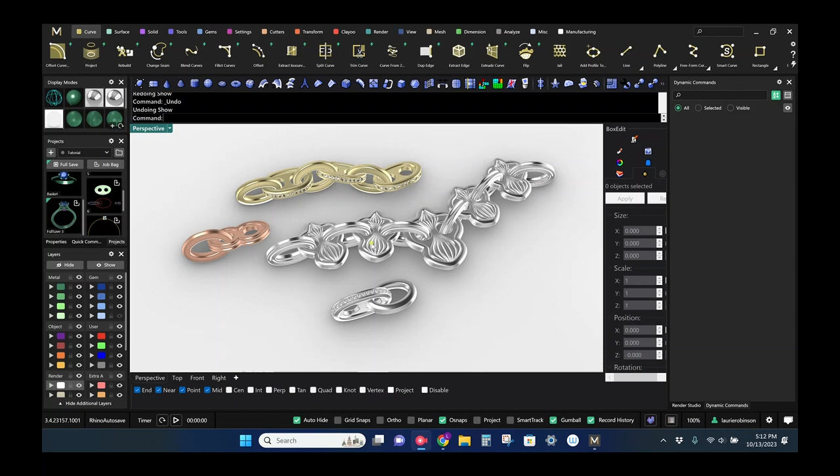Today I want to share my approach to making custom parametric chain links like these ones. You can create many different shapes and textures using this technique. And the beauty is that it is entirely parametric, so you can keep editing and adjusting as you go.

These examples are all of chain links, and that's what I'm going to be focused on showing you today. But you can easily apply what I'm showing you here to other types of jewelry. So for example, you can use this technique to make pendants or earring components or charms or little tags.

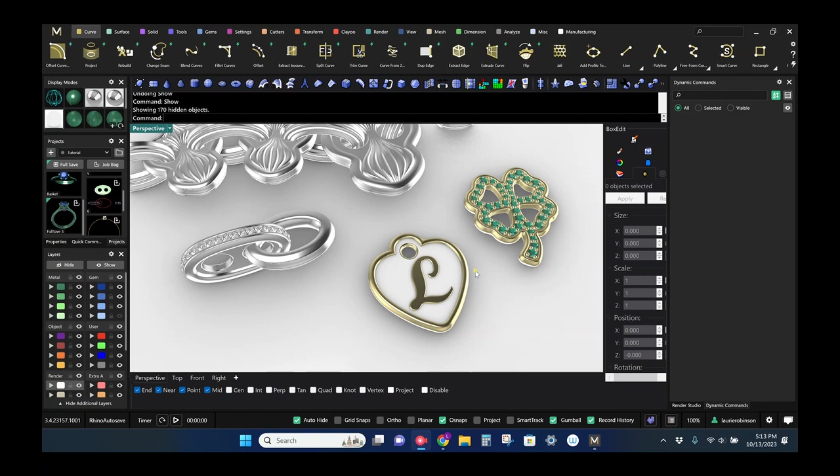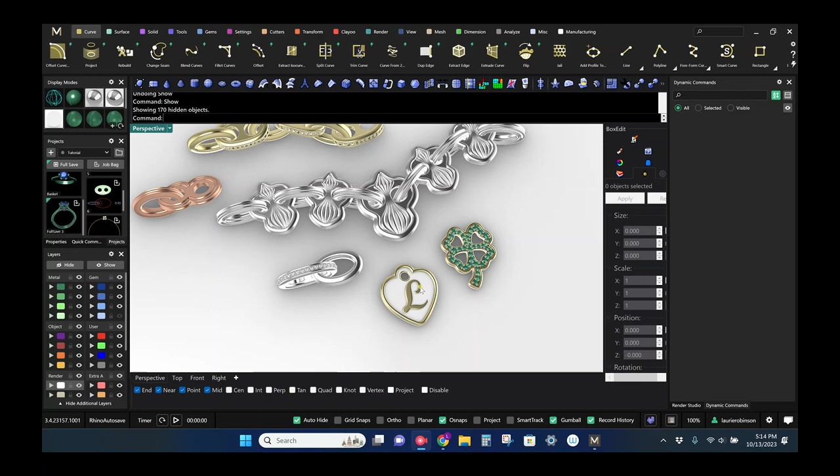It is really quite versatile, and what I like about it is that you start with something that looks very finished, and you can keep editing it instead of creating something with a lot of hard edges that really doesn't look finished and then waiting until the last minute to soften it and make it look finished. So that's why I like to approach it this way, and hopefully you will also find it interesting.

Okay, so let's just get started. I'm going to leave these here for reference for the moment. I'm just going to grab this job bag. Hang on a sec. All right.

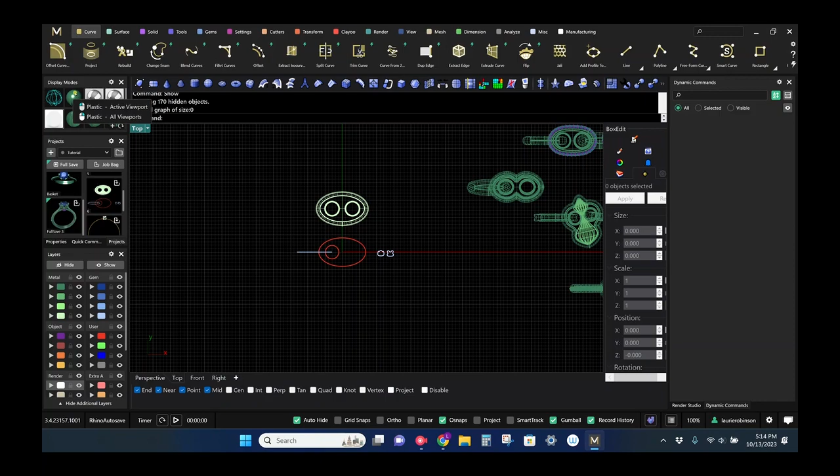So this is the kind of link, let me just change it to perspective, that I'm going to be showing you how to make today. And really more specifically, I want to focus on how to get this kind of filleted edge parametrically, and also just this kind of finished strip around the outside.

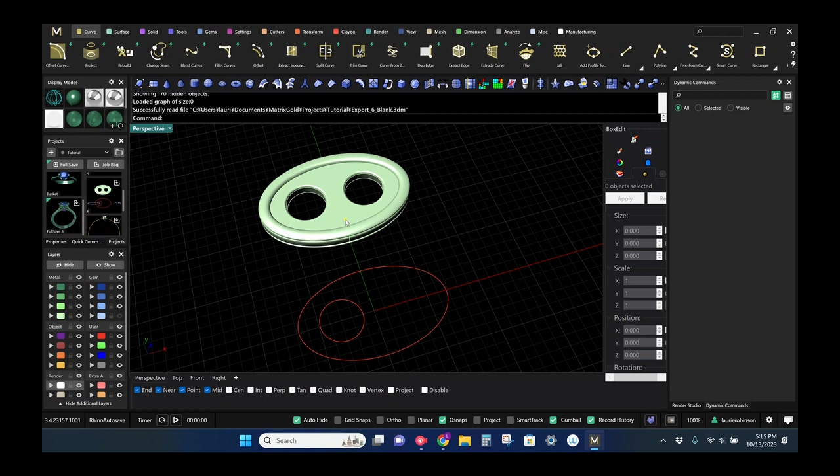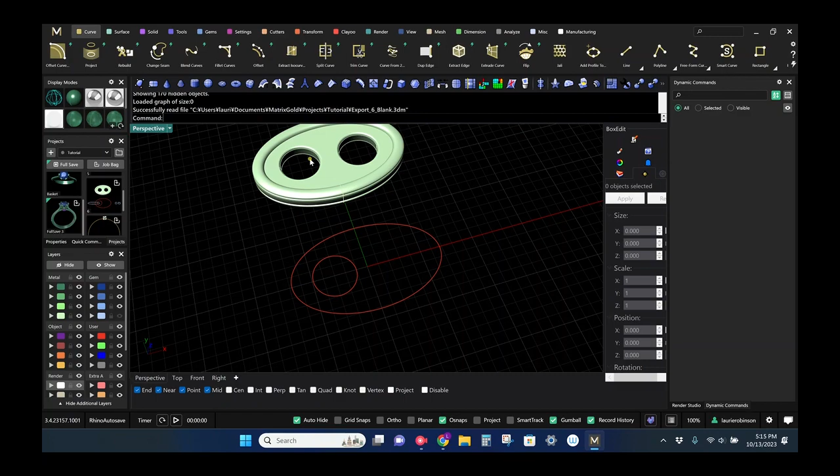Just to note, this works really well on flat surfaces like this, but the more curved your surfaces are, the less well this technique works. And also, the curves that you choose to use for these holes or the shape of your link, or like some of these are a little more complicated over here, like this one or this even, those curves should be kind of smooth or rounded and filleted, so you want to avoid trying to use something with a 90-degree angle or a really acute angle, or a sharp corner. But other than that, it should work pretty well.

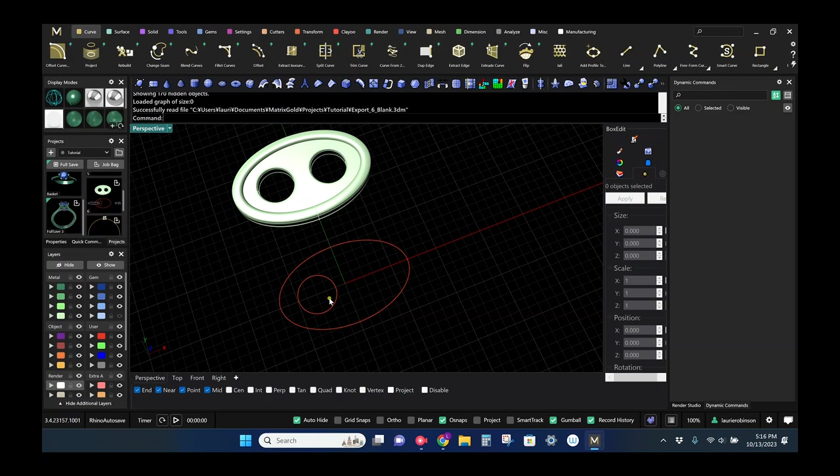Okay, I'm going to also slide this out of the way for now. Okay, so I'm just going to start with these curves. I'm going to turn the points on so you can see. They are both circle curves with 12 points. This oval started out just as a circle with 12 points, and if I run the circle command, I know this is really very specific, but I like to use deformable, and then I can name my point count before I get started.

And then I always like my seam either to be down here at 6 or over here at 3, so I usually just pull down. And then that allows you to immediately start changing the placement of control points without having to rebuild your curve. Okay, first of all, let's just look at those points one more time. So you can just see here quickly that all of these are symmetrical. That's important to me because I want this design to have symmetry.

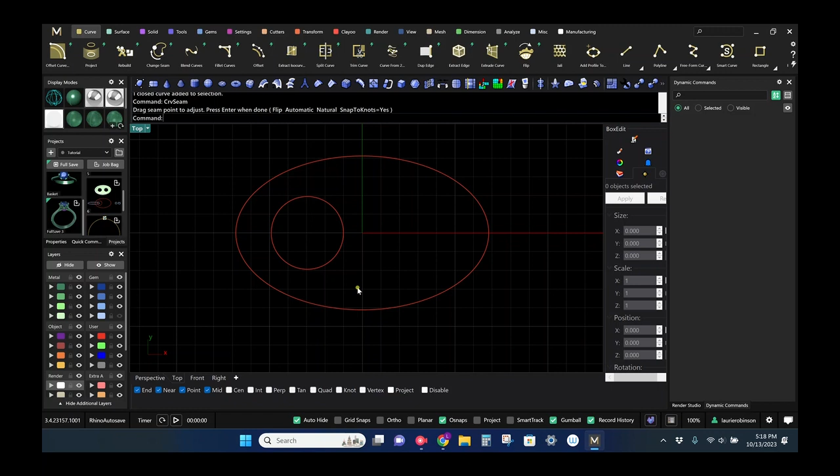And the other thing that I like to know is where the seam is. So I'm just going to type curve seam, and I can see this is here right at the 6 o'clock point, and then this should be the same. Okay, so because I'm just using these very simple curves to build the rest of my geometry or my shapes, I like to really make sure it's exactly how I want it, because that will allow me to edit more easily and nothing unexpected will happen.

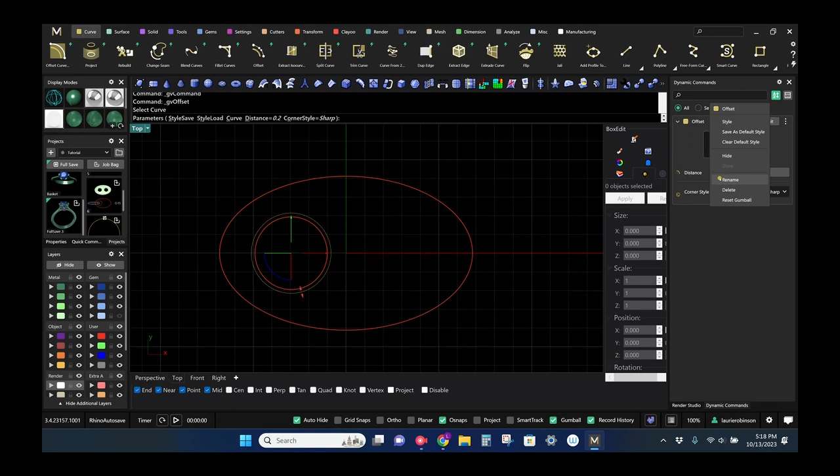So the first thing to do is to use the offset command. I'm going to offset this circle by 0.2, and this is pretty specific offset, but that will make sense in a minute or two. And I'm going to rename this just in case I make another offset. I'll be able to identify which one is which.

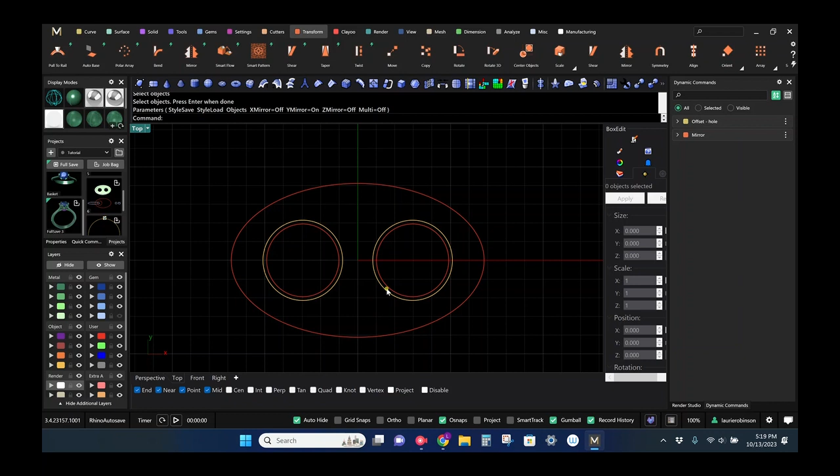All right, and now I'm going to come up here, transform, and just use the dynamic mirror. And I'm going to grab these two objects. That's fine. I want them to be mirrored over the y-axis. I'm going to ungroup these just to keep things a little easier. And I'm also going to put this on yellow so that I know it's dynamic.

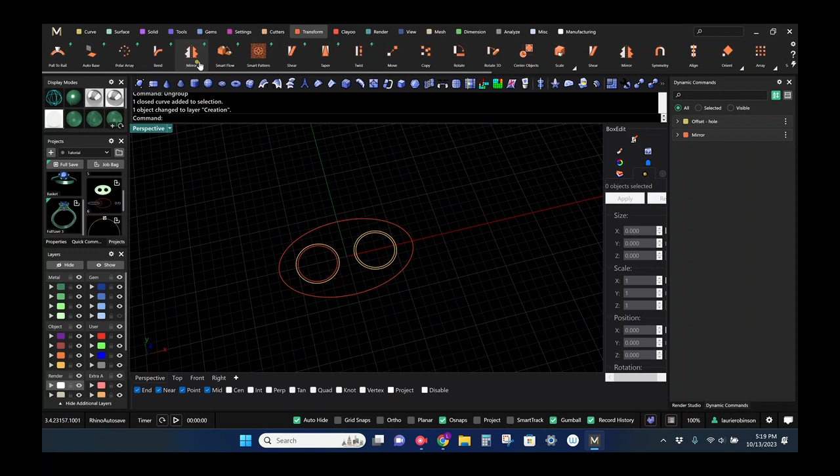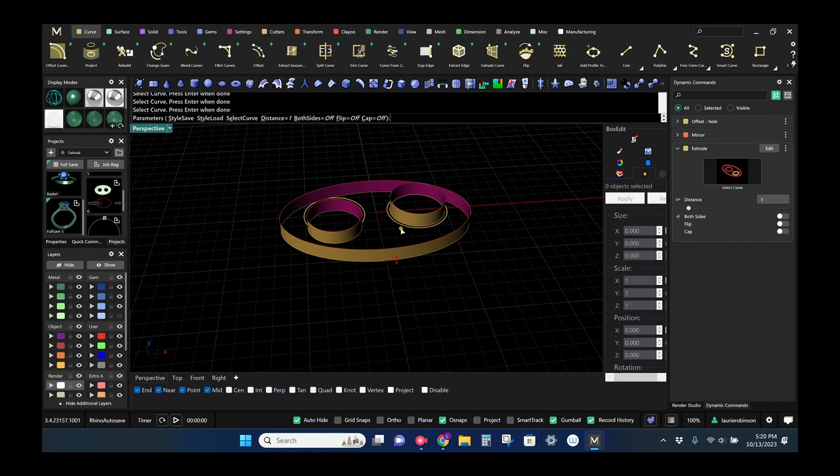All right, so now I'm going to make some extrusions to make this inner part of the link. I'm going to go back to curve, extrude curve, and grab this outside curve and these two inside curves. You can see these are going in opposite directions, and that's okay. This is mirrored, so it's sort of like a page in a book, just going in the opposite direction. But I'm going to use both sides, so it doesn't matter here.

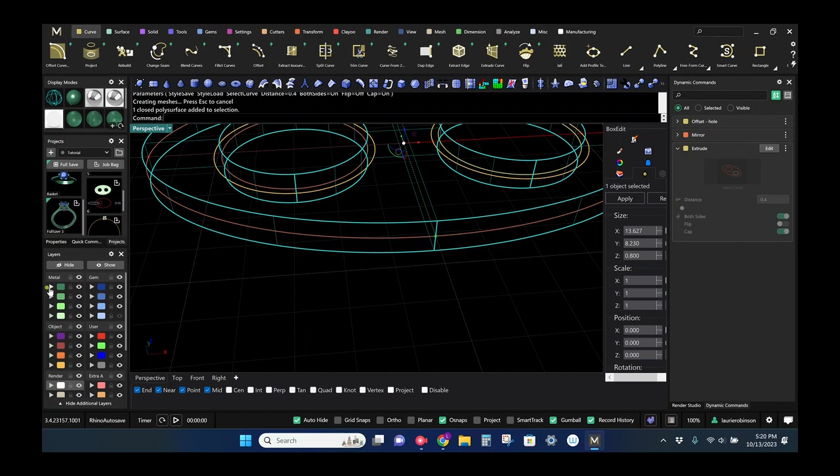I'm going to cap this, and make the distance 0.4. I'll put this on green as I go. Now I'm going to run that command again just by right-clicking, grab my outside curve again, and these two offsets. Same thing, I'm going to cap both sides, and make this 0.6.

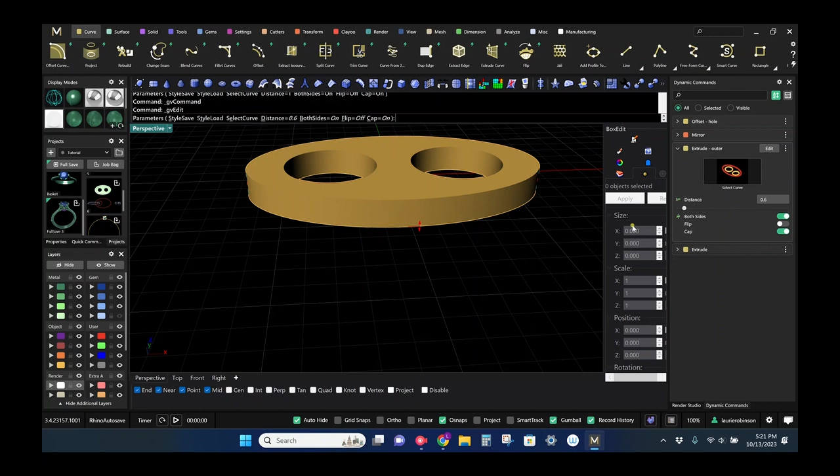So if you remember, I made the last one 0.4, so I want my distance to be 0.2 more than my first extrusion, which is also the value of my offset. That's not quite right, let's see. 0.6 - I think I didn't press enter. Okay, and I'm just going to rename this one outer, and this one.

And now while I still have it in wireframe, I'm going to use the project command. I'm going to grab these two offset curves, one on each side, right click, and select objects to project to. I'll select this inner extrusion, which is green. Just press enter one more time. Now let's move this extrusion to green too.

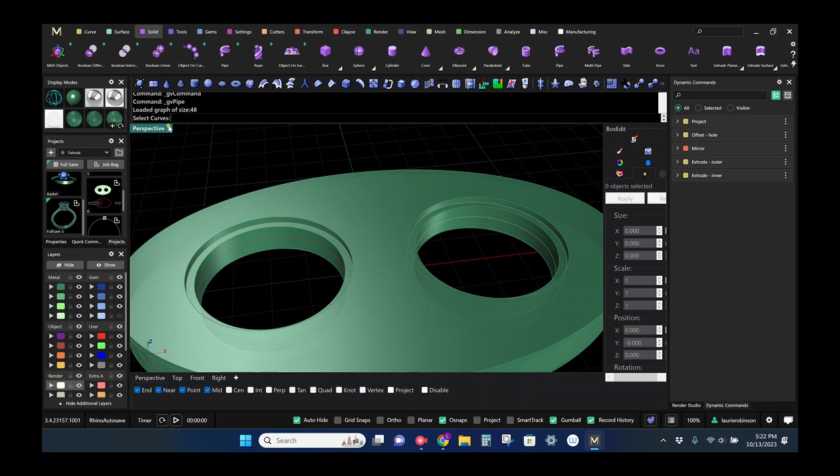Okay, so these curves here are my projected curves, you can see. And now I'm just going to grab dynamic pipe, and select the curves. I'll just grab this one, and it will select all four. This looks the same on the underside as well, and it grabs all four curves because it projected that curve on the inside, not only to this top surface, but also to the surface on the bottom, if that makes sense.

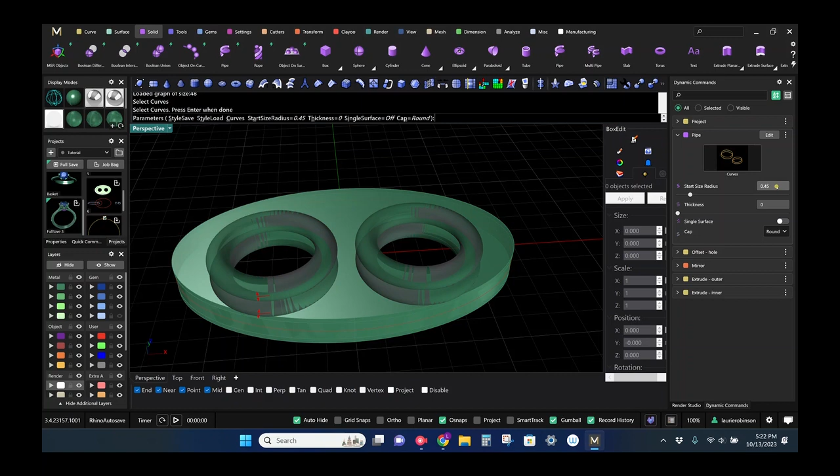Okay, and now I'm just going to make this radius 0.2, again the same value as my offset. So now that's pretty much it to creating this nice filleted hole here. And what's nice about this is that you can just keep editing this.

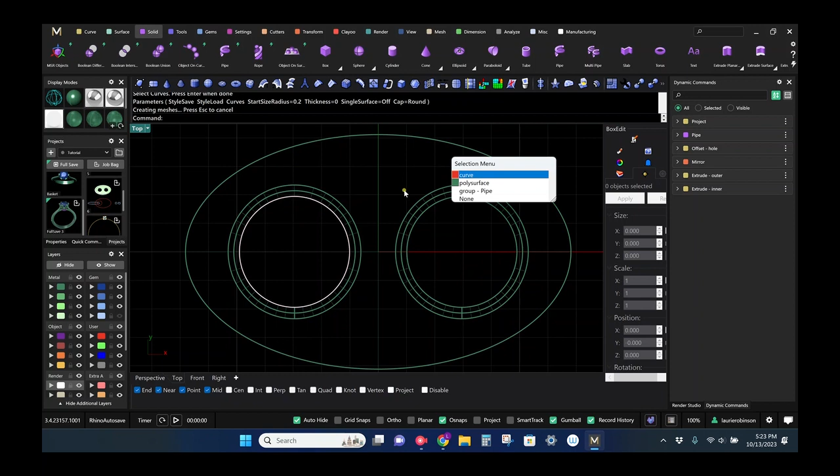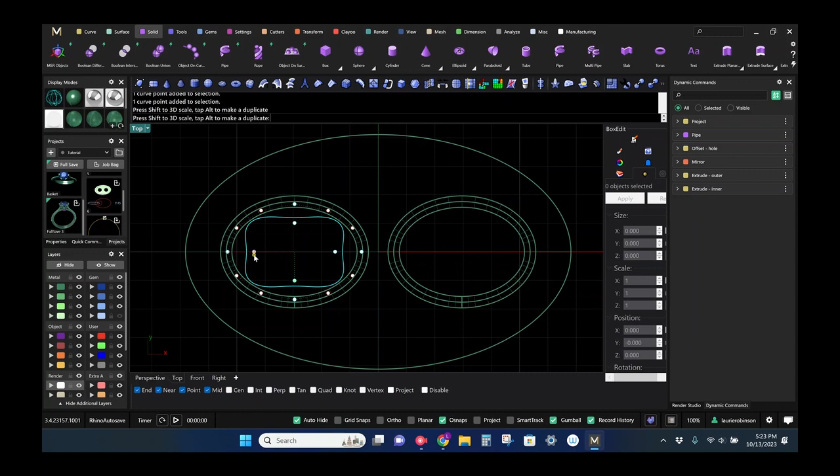So let's say you decided actually you wanted your holes to be oval and maybe wider, or maybe you want to turn the points on, and for some crazy reason you want to bring all of these points toward each other, like this. You can make all of these kinds of changes and still maintain this filleted look.

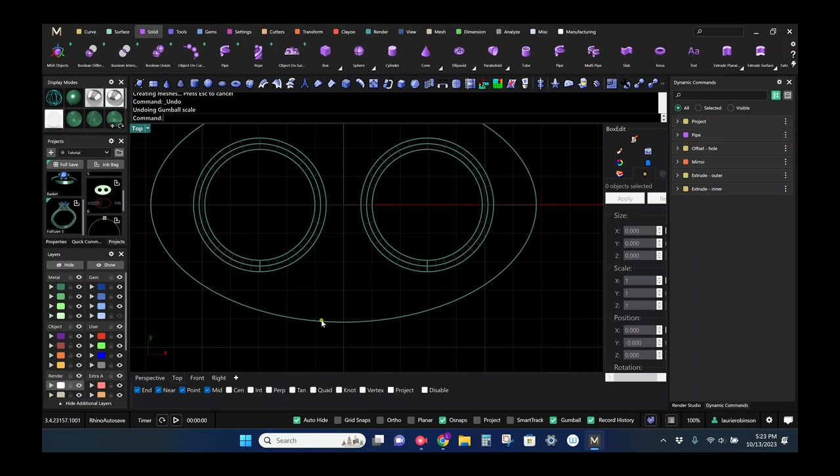So that is really nice, and that's kind of the first piece of flexibility. And then you can also decide that you want to edit this curve, so you can scale it like this or like this. These fillets aren't changing, the position of the hole isn't changing. You can also turn on the control points just the same, and maybe you want this to be more square.

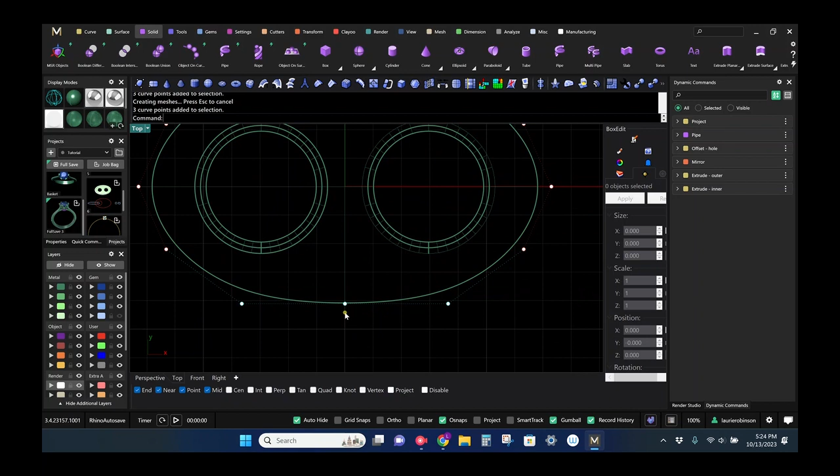So I'm just grabbing these control points and the scaling handle, and I'm going to type 0 to make them planar, and I'll do the same here, and just do this on the other sides. I don't have to keep entering 0 because it will remember the last value I used. And let's just slide these out this way.

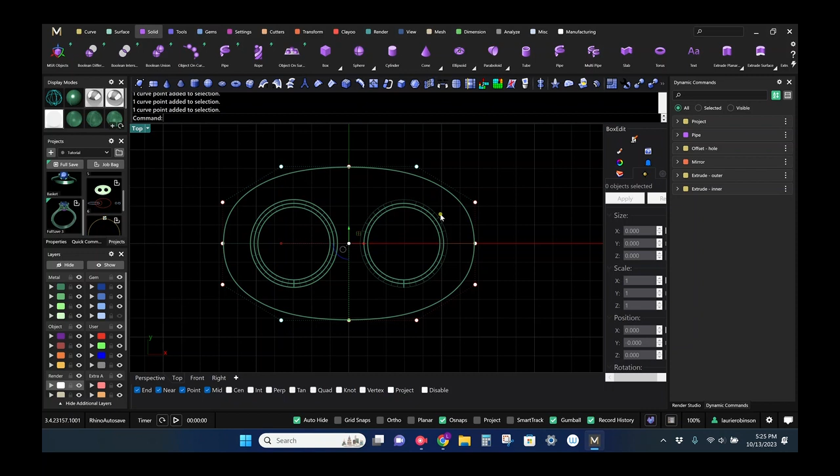Okay, grabbed too many things there, so let's grab this and this and this and this. Okay, and then we will just pull them out like this. And then you end up with something that is much more square. Maybe I'll make it - oops, it's hard to select this - maybe thinner.

And now maybe I want to change these, make them a little more oval and longer. Or maybe not longer, I'll just pull them out a bit. So something like that. And maybe I can make the whole thing a little shorter.

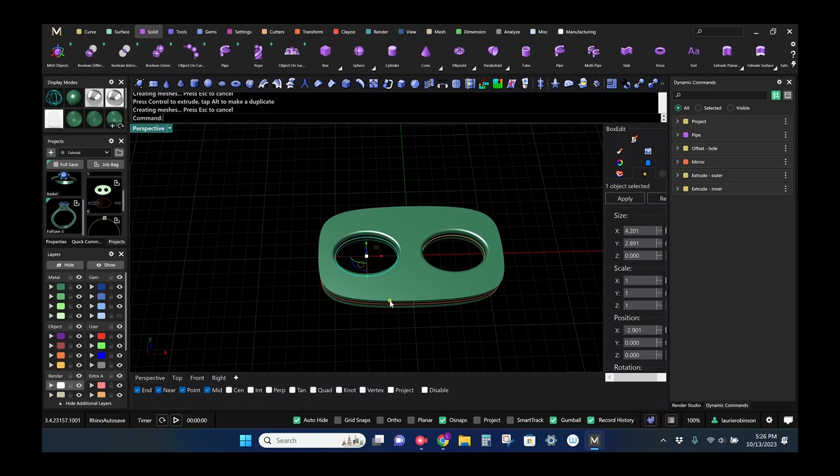Okay, so I'm really belaboring this point, but as you can see, it is very, very, very flexible, and it continues to be even after you put this nice decorative bit around the outside, which I'll do right now.

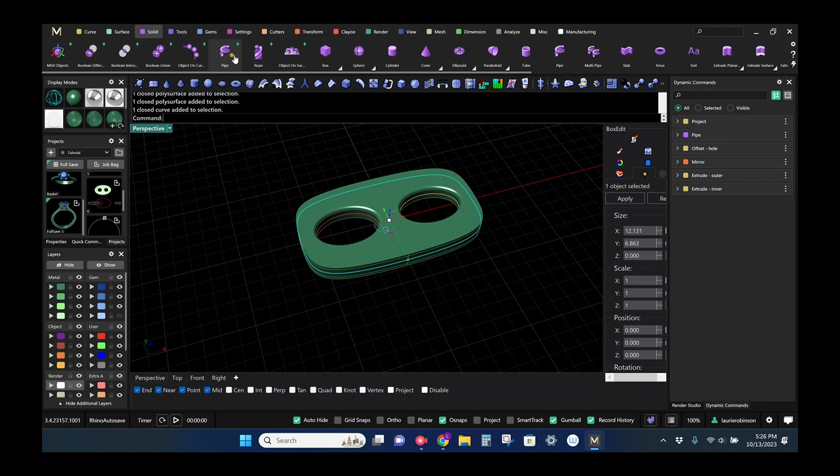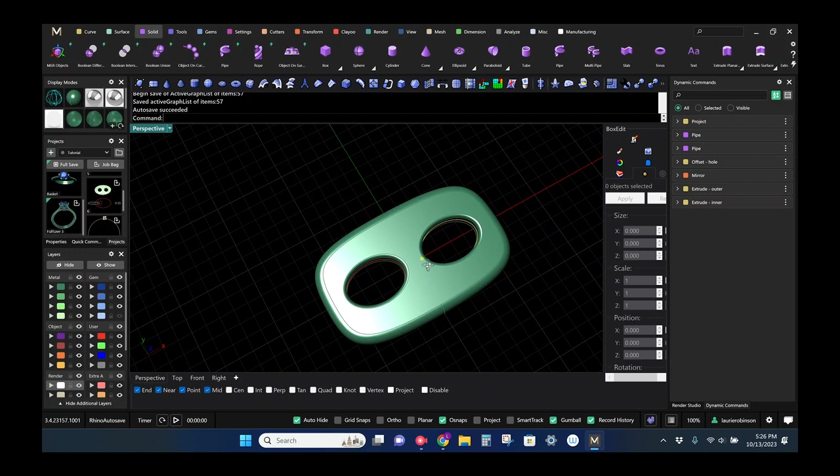So you could go really simple here. You could actually just grab this curve and do another pipe, and since I made the outer surface 0.6 on both sides, you know it's got a radius of 0.6, so you can just match that with your pipe, and then you can end up with something very smooth looking, with no raised rim. So that's one option, but I'm going to do something different.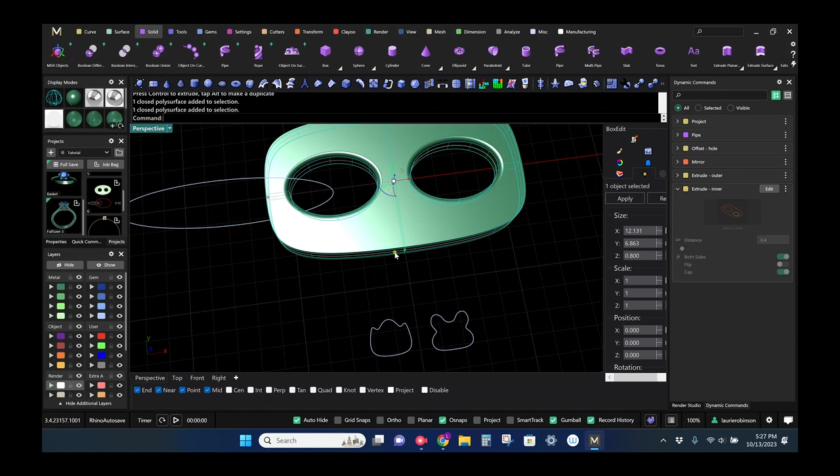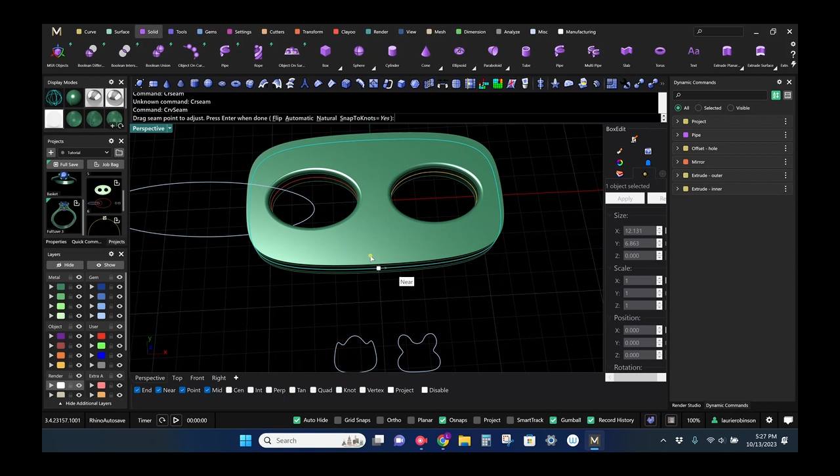Let's bring these back. I am going to put a profile on this curve and create a sweep. Actually, before I do that, I'm just going to come back in here and select my curve, and I just want to see if the curve seam has changed positions since I moved my points around. And it hasn't. But that is something to check for. If you add more points, or delete points, or insert points, sometimes the seam moves around, and it's just good to know where it is.

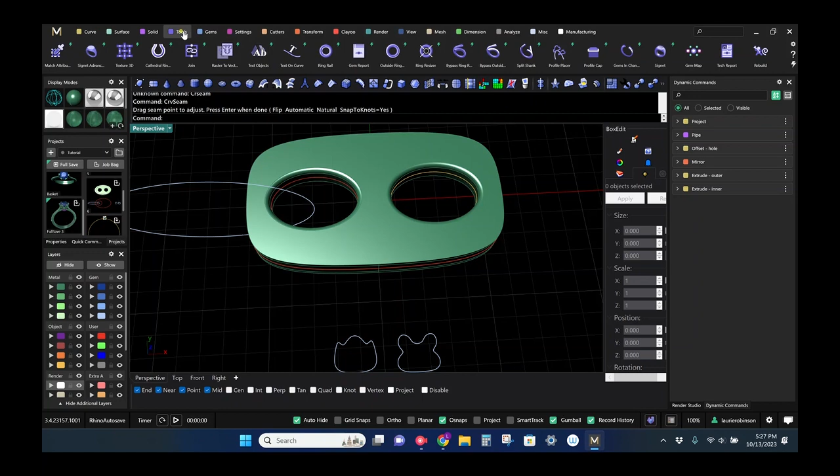Okay, so as I said, I'm going to create a sweep, and a really quick way to do that, as most of you know, is to add your profile here to the library, and then come over here to Tools and use Profile Placer. That is very useful if you have more than one shape or size of profile in a sweep, but in this case, I'm only going to need one profile.

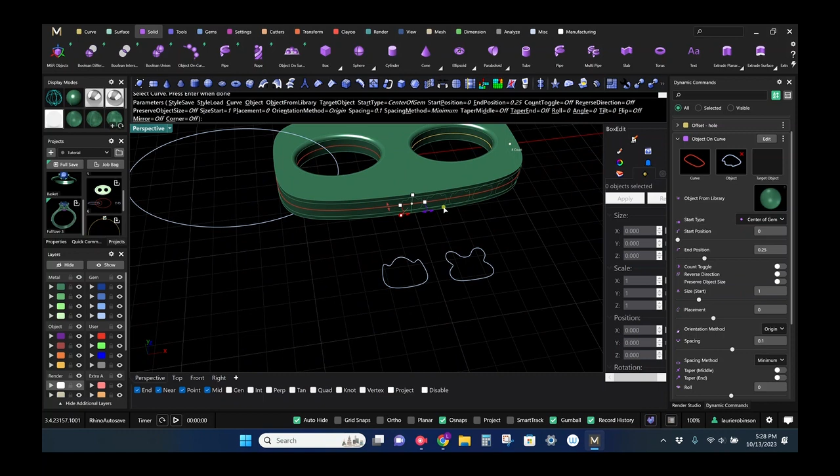So instead of Profile Placer, I'm going to come to Solid and use Object on Curve. I'm going to select my curve, press Enter, and then come up here to Object, and it's asking me to select an object, so I'm going to select this curve, right click, and then you can kind of see them show up here. I only need one, so I'm going to toggle this to 1, and then I want to preserve object size.

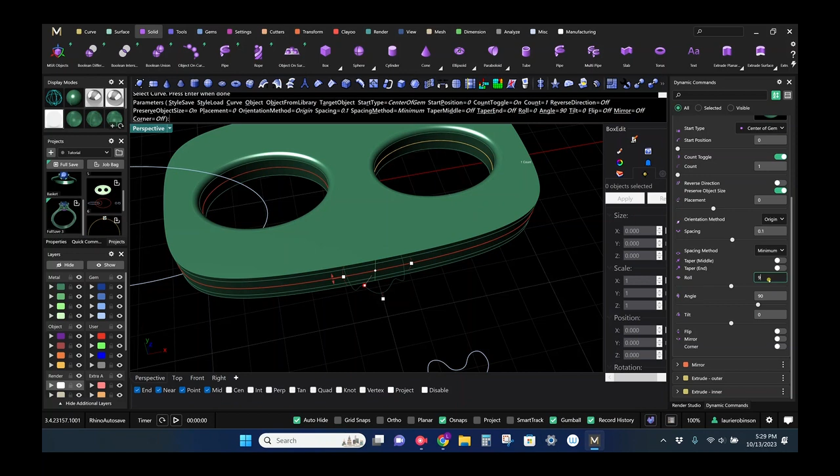And then the last thing would be to just get this aligned the right way. Up. And I did not, so let's just go back. I think I want to angle it first and then roll it. Okay, there we go. And maybe I'll bring it out from the curve just a bit. Okay, I'm going to put this on yellow, it's easier to see that way.

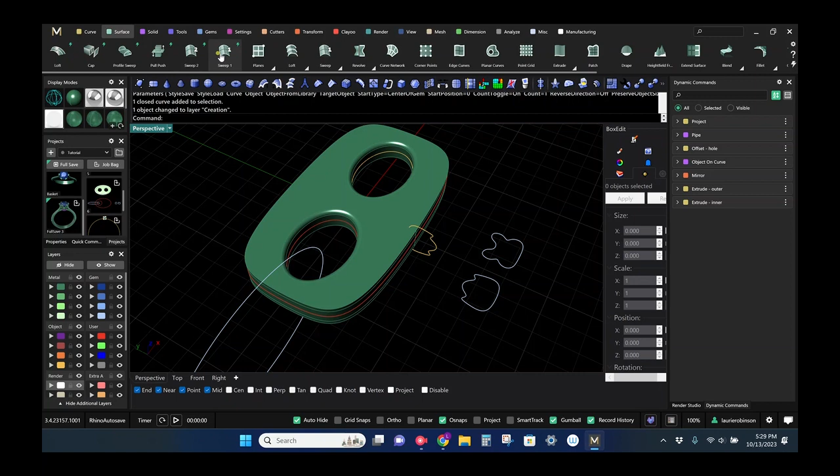Alright, so now I have my curve, and all I have to do is come up here to Surface and make a sweep 1. I'm going to select this curve again, this profile, and then there is my finished edge.

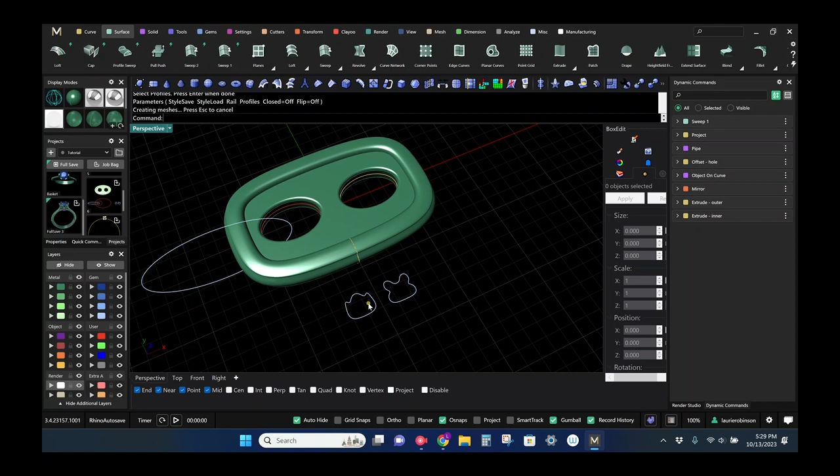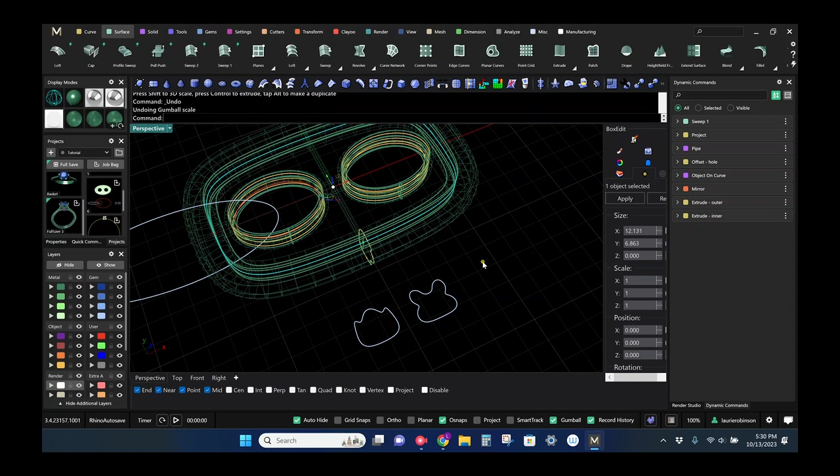Okay, and the reason that I really like using Object on Curve here, well, number one, you could easily just move your curve there and have it intersecting your rail. But I like to use this dynamic command because if you were to suddenly decide, actually, no, I really think I want this to be wide like this, you don't have to worry about moving your curve again. It's exactly where it was in relation to your rail. So that is the first reason that I like using it a lot.

And then I really like that you can preserve the object size. So if I select this curve, I can see here exactly what size it is. And if I need a really specific size, you can use this a little bit like you would the Profile Placer. This is just box edit.

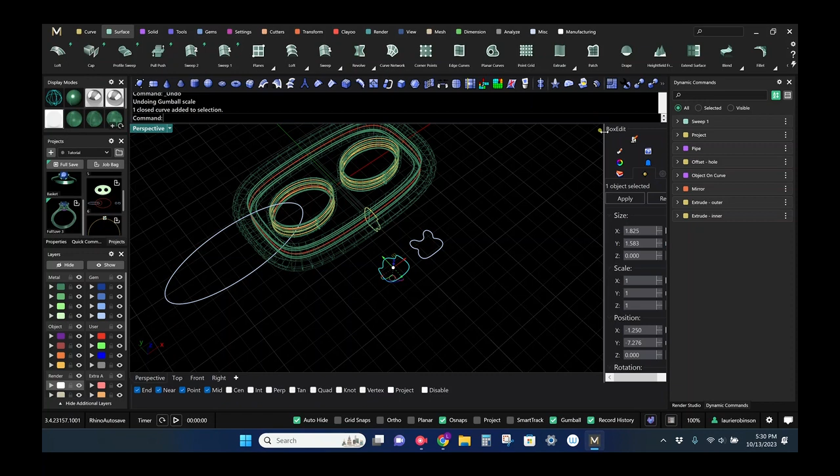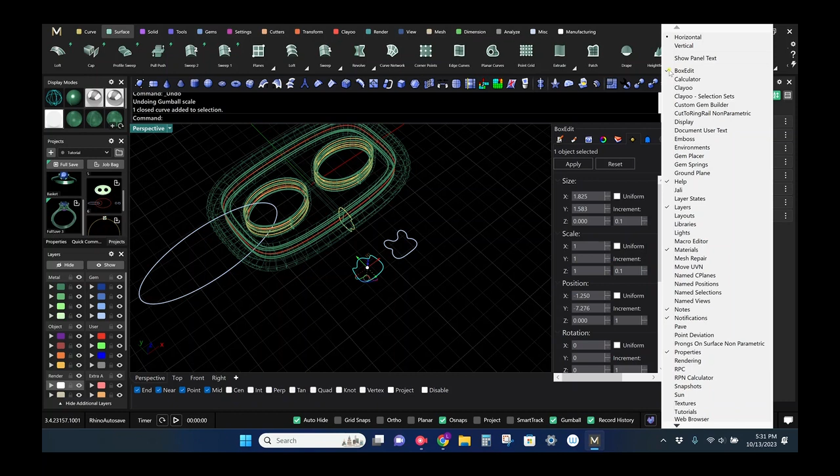It's just one of the settings here. You can have it... not activated, enabled. So you can see there's a long list here of these different options, and I just have box edit selected. That's up here. So anyway, enough about that. If you're looking for that, you can just type box edit into the command line.

So if I select this object, I can see what its dimensions are, and if I need to change it, then I can change it. And that will also be reflected here in the object on curve. So that is pretty nice.

And then you can also turn the points on. And you can just edit these right here in real time, and that will also be updated.

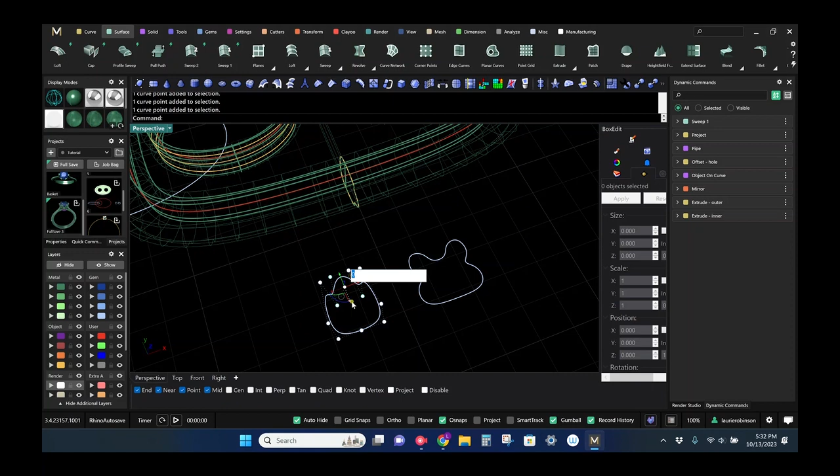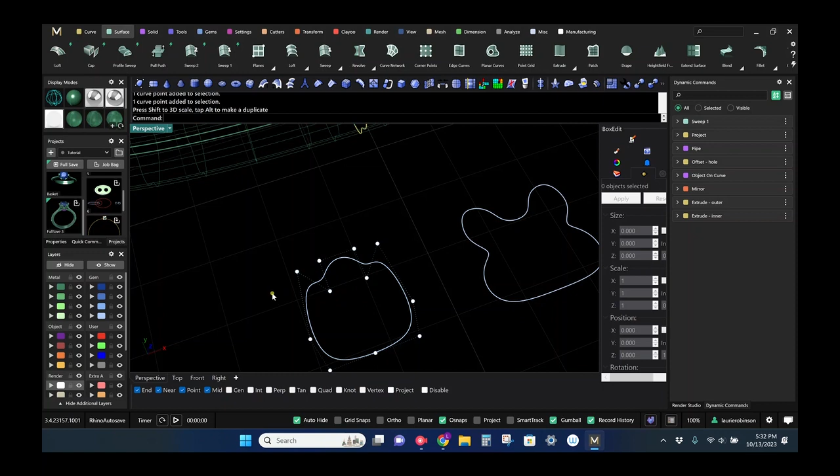I think one drawback of the Profile Placer is just that the editor can be kind of clunky, and also, when you put new profiles into the library, it can change the count and placement of your control points, which I find pretty annoying, especially since I really like to have a lot of control over those. So anyway, that's why I like using Object on Curve in this case.

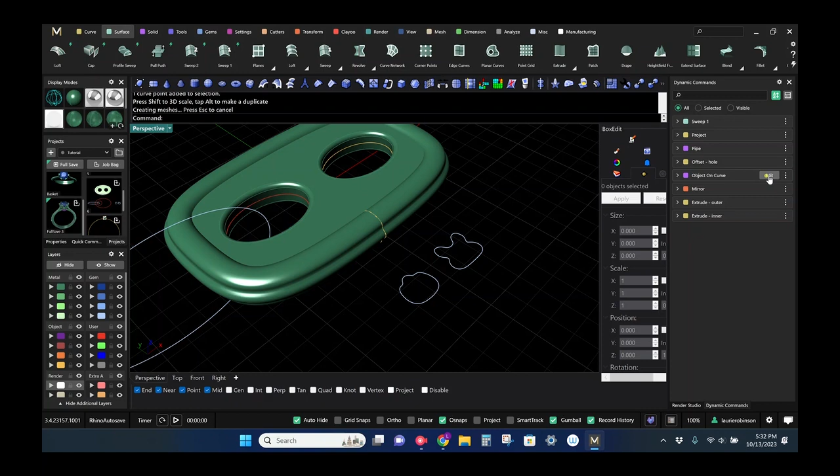You couldn't really see all those little edits that I was making, but maybe I'll just do a few more. So let's say maybe I want this to be rounder, and you don't have to keep this symmetrical if you don't want to. Or let's say I just decide I'm sick of this profile and I want to change it. I can just come here, get rid of this, click it again, and then grab this bunny ear type looking thing.

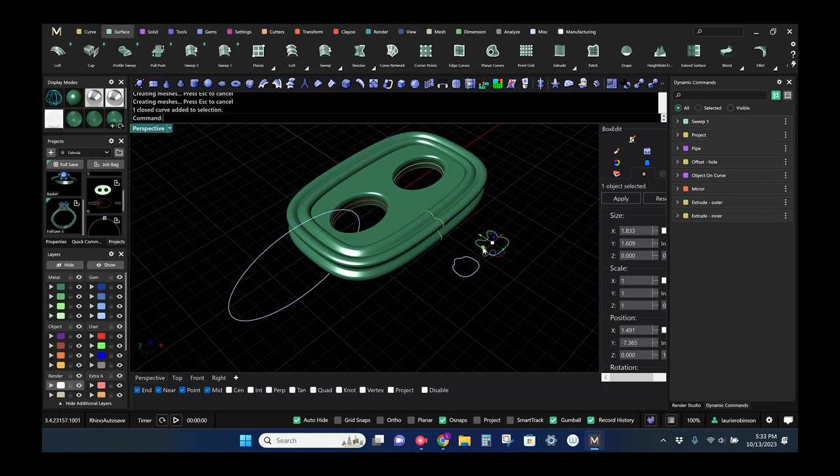So you could have 10 little profiles here and you can add them or exchange them really easily, which I quite like.

So maybe I'll just simplify this one a little bit. Well, actually, that's not too bad. Let's see, maybe I'll get rid of these and see what happens.

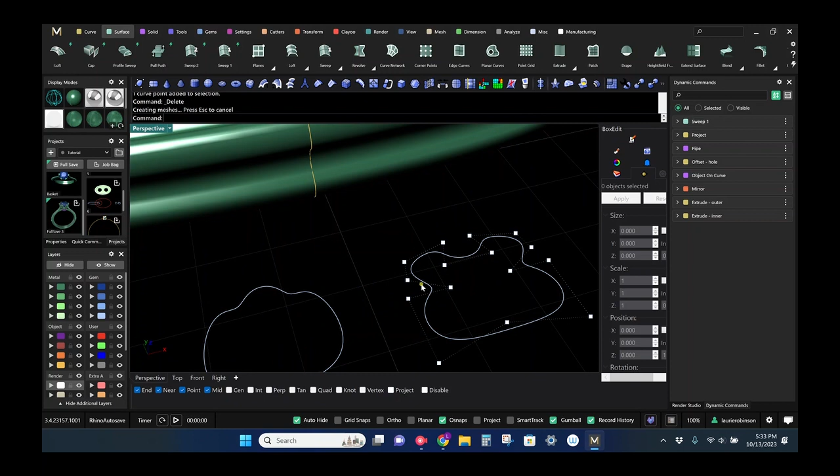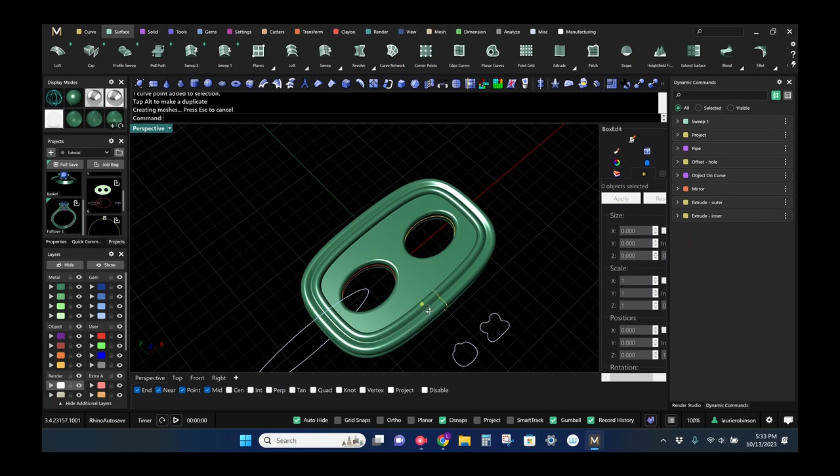This is another thing that I really like about working with a parametric workflow, is that sometimes you will discover things that you really didn't anticipate or mean to do, and it's only through the kind of automatic changes that happen when you're working parametrically that you even discover something will even work. So anyway, so there is the link.

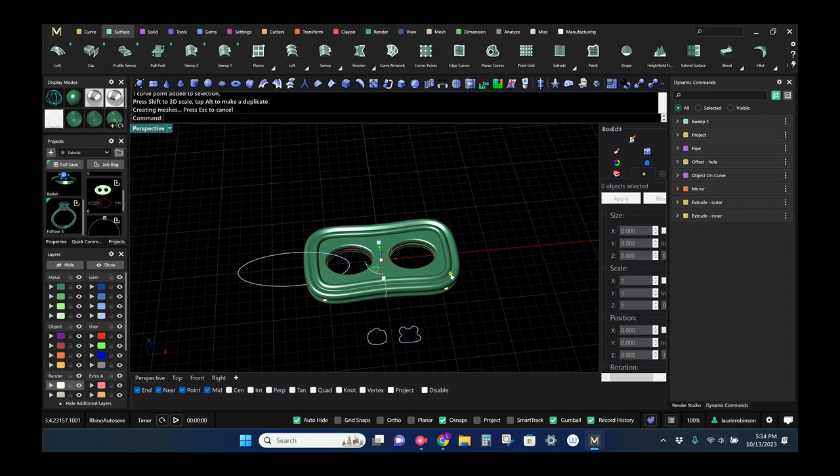It's pretty much all done. You can continue editing. I mean, even if I took this now and grabbed the points and maybe decided, you know, I really need these to be like this, you can see that it's just updating. It's not a problem.

Okay, but now I'm going to create this link and then I'm going to array them around a curve that's sort of approximately a 16-inch neck curve, just to show you how that looks. So you could make this link the same way that you made this one. You could do a pipe, or you could use profile placer, but I'm going to use a rope just for fun.

So I'm just going to change the diameter till I like the way it looks. Yeah, that looks pretty good.

From the front here, I'll just maybe grab the curve and squish it. It doesn't really look a little bit like it's not centered. Okay.

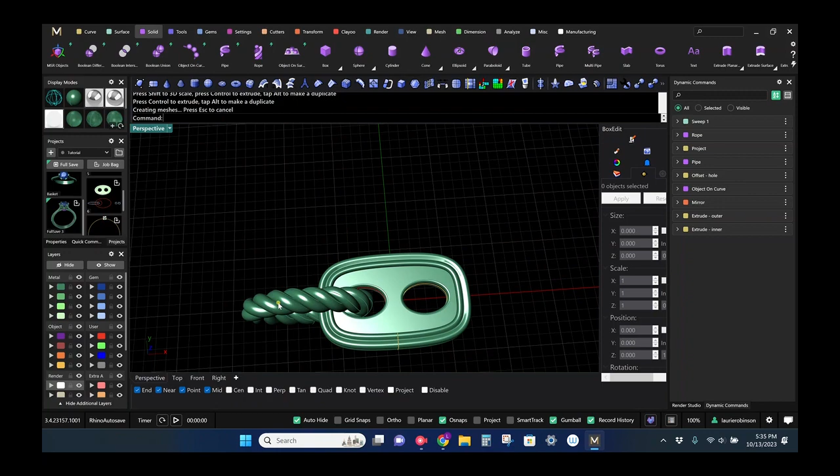So now I have these two links, and I'm going to hide this blue and the red. And so now I can array them around, just maybe for a rendering, you know, like let's say you were dying to see how this would look as a necklace.

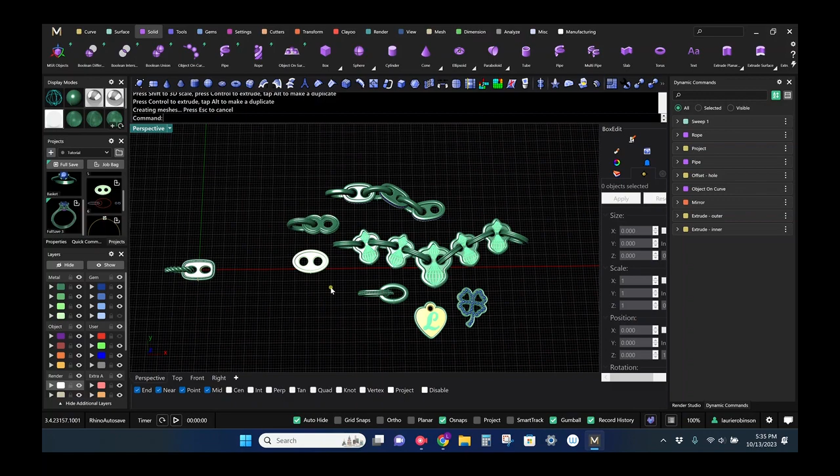I'm just going to do that final step. So first, let me put these all somewhere else.

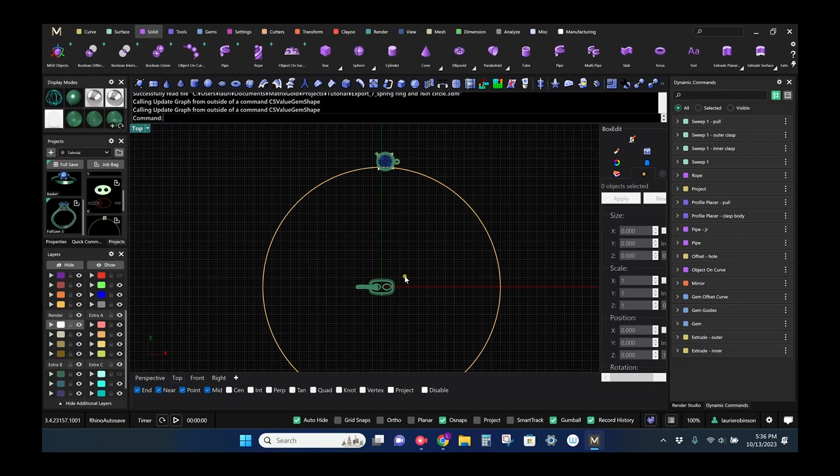Okay, I have a curve that I use for necklaces and also a spring ring for rendering purposes. I created those already, so I'm just going to import those and show you what I have going on here.

I use spring rings a fair amount when I'm rendering, and I really don't like having to create them again and again. And I also feel like they don't always work when you uniformly scale them, so I like to have control over all the different elements of the spring ring.

So I built mine around a gem, so I used a gem offset curve as my rail, and then I used profile placer to create this inner ring and the outer ring.

So I have these profiles which make the outer ring, and then I have the inner ring profiles, and then I have one, or I guess there's just one for that since it actually goes all the way around. And then I have this one, which is a curve turned perpendicular that I can use for my jump ring.

And obviously this isn't functional, but it gives a pretty good impression of a spring ring. And then the last thing I did is just use gem guides to create

some horizontal lines for my pull. And I like this because you can adjust the girdle spacing. So as it gets bigger, if you need the pull to be longer, you can adjust it this way.

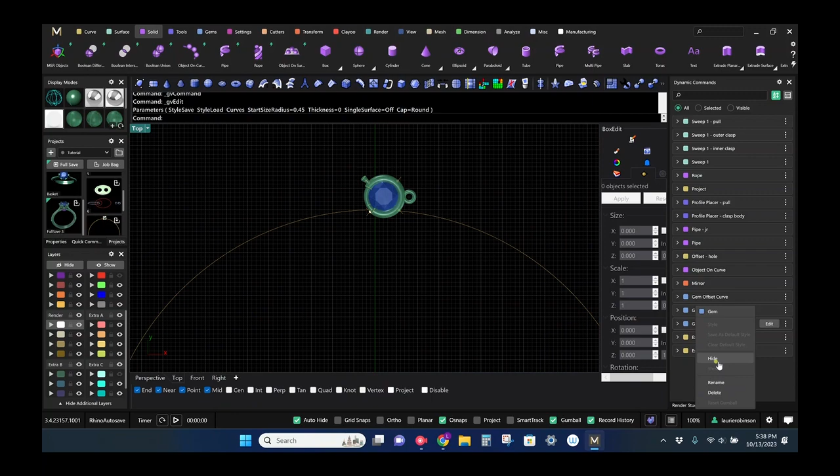Okay, enough about that. I'm going to hide this gem. And before I put these on, I'm going to use object on curve one final time, but I'm just going to create a Boolean union here.

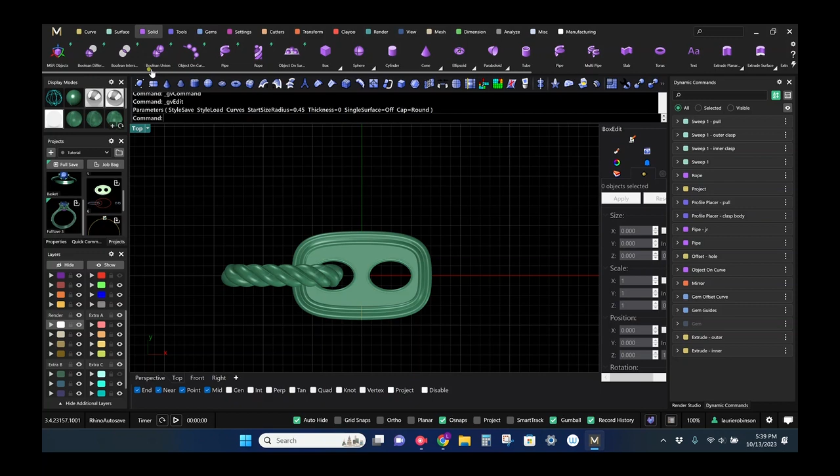I think this works a lot better when this isn't multiple pieces. So I'm just going to do that dynamically here with Boolean union. I'm going to select my outer rail first, and then you just want to make sure you get both of these surfaces and the pipes.

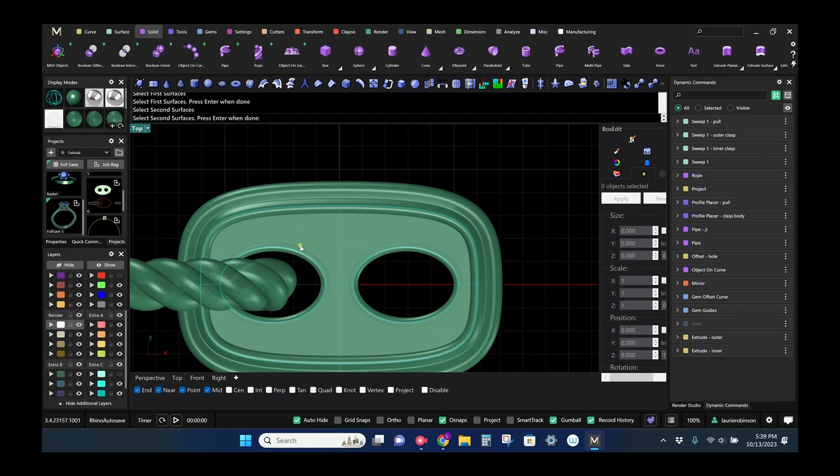I don't think that's everything. Let's go back. This, and then these, and this. One more time. All right, this surface, and then this, and this, and these. Is that working? Yeah, okay.

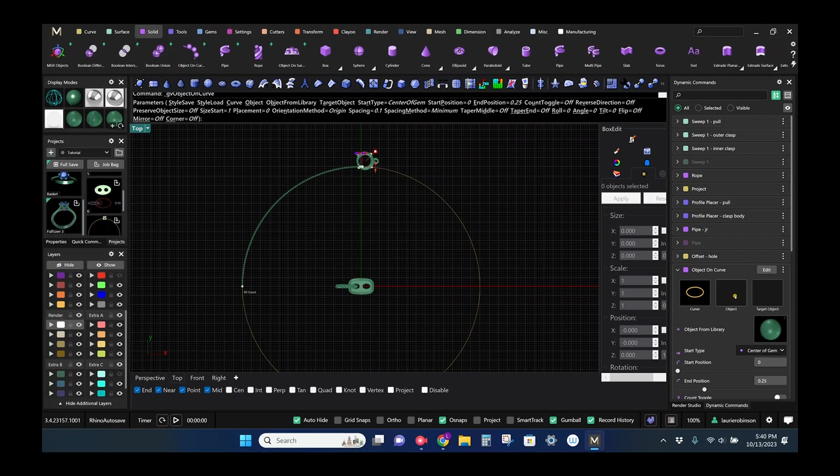All right, so now I can use object on curve one last time. I'm going to select my curve, and I am going to choose to preserve the size of this object, but first I'm going to select the object. What's nice is you can select two objects at one time now, instead of having to do this two separate times.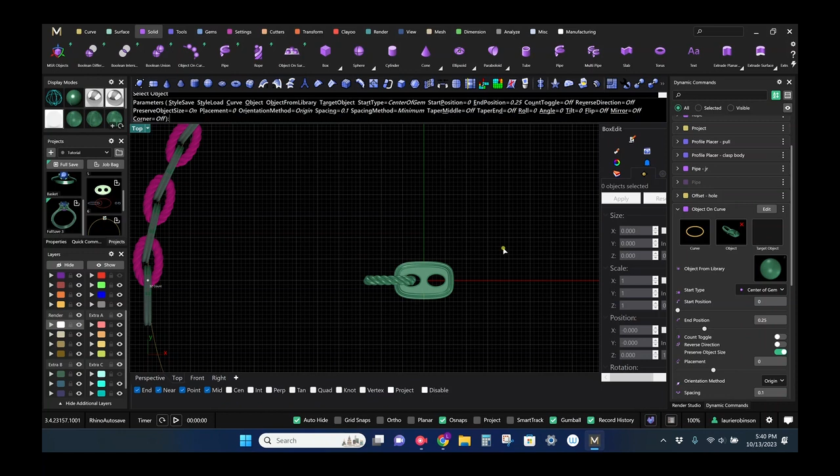And I'm gonna preserve object size, and I'm just gonna change the angle. I think it's the angle. Sometimes it's a guessing game, but I'm gonna change this to 90 and see what happens. Yep. And I can see I don't love the way this looks, but I can change that in a second.

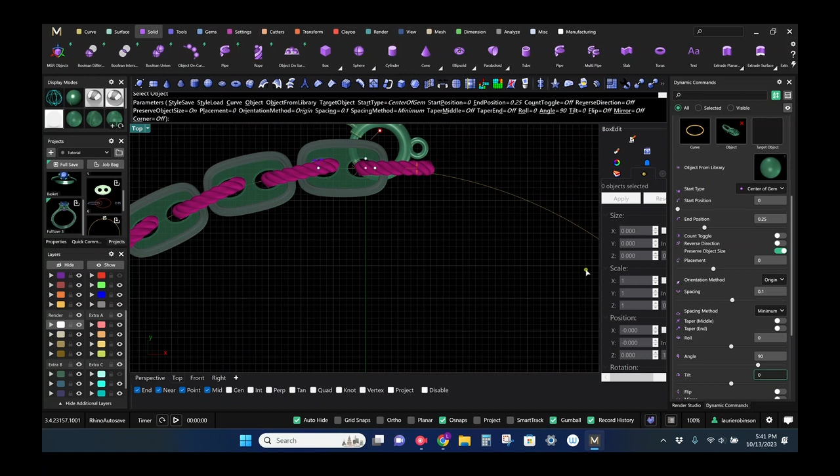Right now I'm just gonna fix the spacing. I'm gonna maybe try 1.5. It's too far, 1.2. Let me just pull this all the way around first.

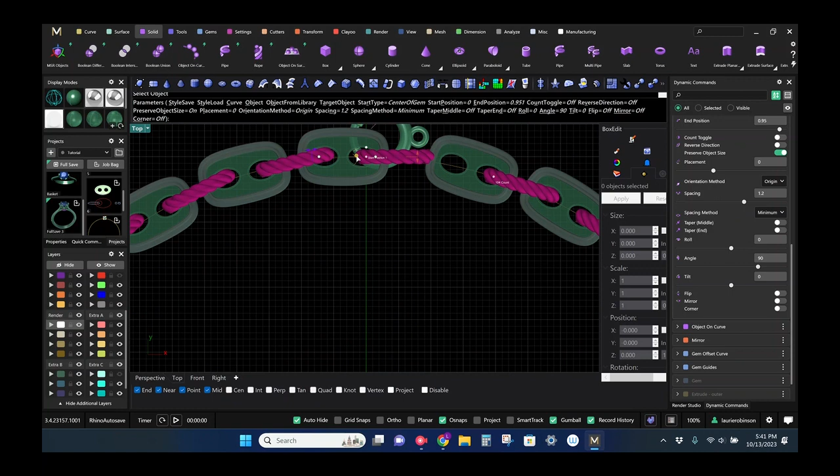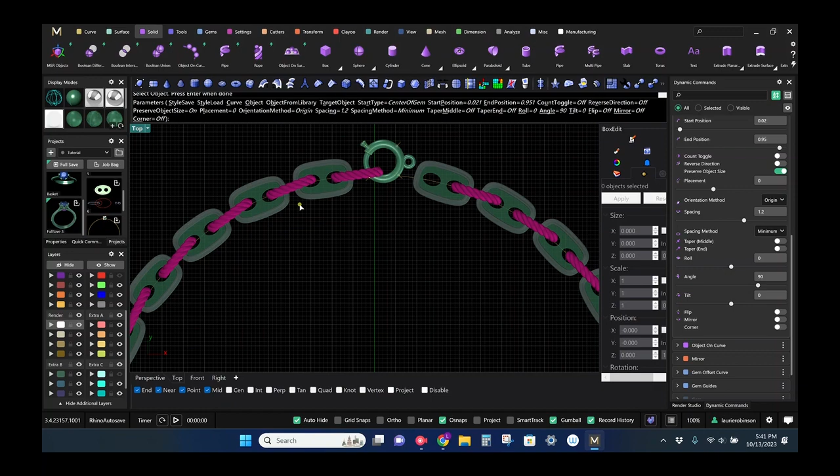And I'm going to change this. I find it really hard to see these handles sometimes. Okay, that looks pretty good. I'm just going to right click to accept that because I'm having a hard time really seeing it.

So I'll just make a few last changes. First I'm going to just change this situation where it kind of looks very rigidly like it's at a diagonal. So I'm going to come back in here, turn wireframe on.

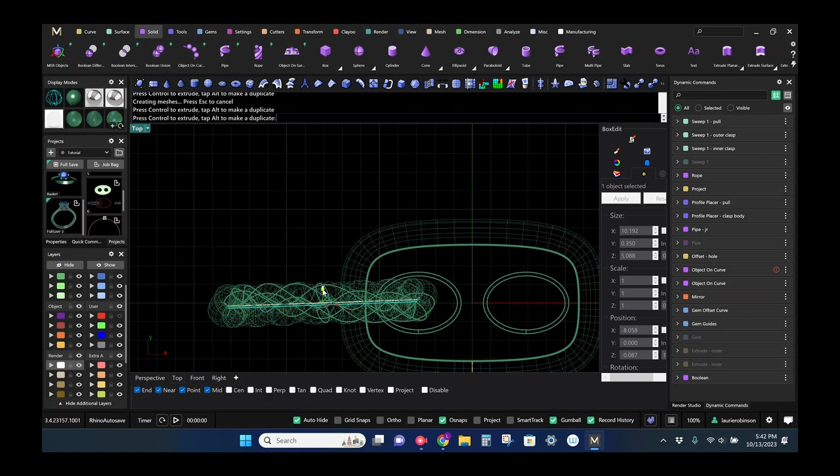I'm just going to grab this curve up, and I'm just going to very subtly angle it, and move it down just a hair, and I think that should improve the way it arrays around. Yep, that looks better.

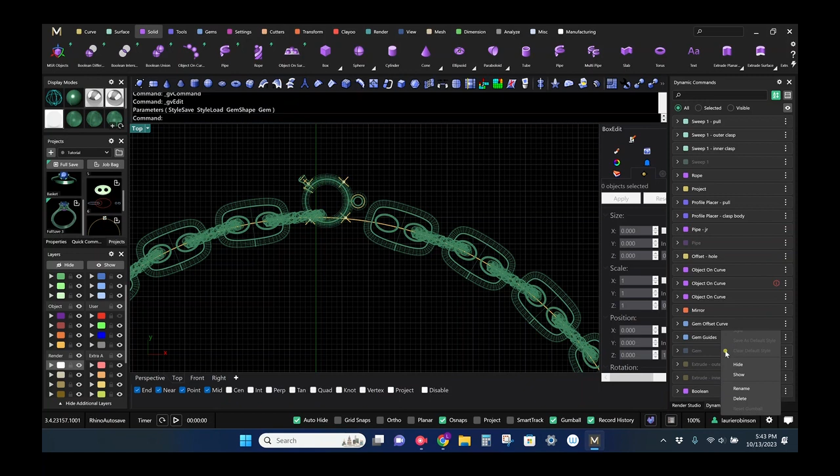And I'm gonna turn my gem back on, and actually I'm gonna do it this way. I'm gonna show this because actually you can just move these with a gumball and it does not affect the parametric history. It's easier to do it this way, I find.

Maybe I'll just rotate it just a hair. Okay, and then I'll just turn this off instead. And then I'm just going to make a jump ring. I'm going to use Torus. And I don't know, maybe something like this.

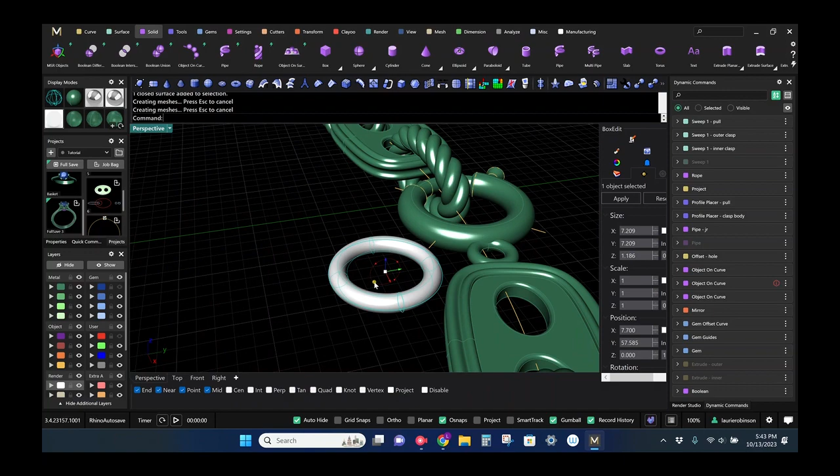This is going kind of slow now, but I'm almost done. Let's just slide this here. That looks okay. I mean, obviously, this is just for a rendering, so it's not hugely important how it looks, or if it's totally realistic or not. Okay, let's turn this off and hide this.

And let's look at this maybe, and let's try something fun like drawing, technical drawing. Just give it a second. Okay, so now you have really easily created this

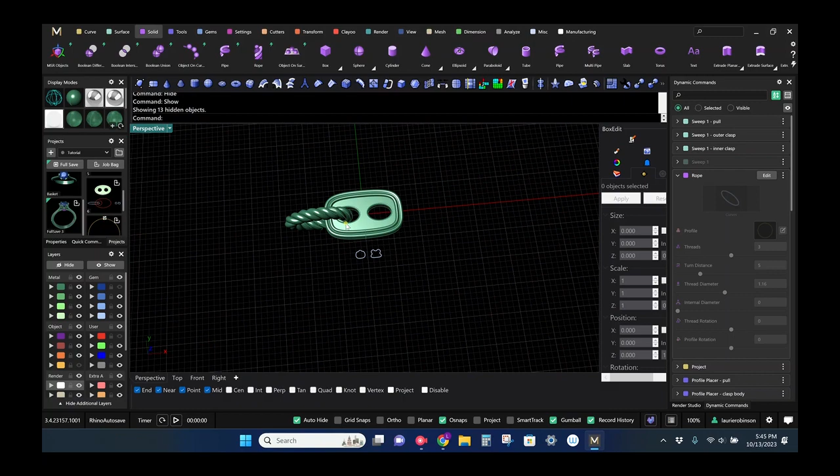custom link, and it's totally flexible. You can still change it. You can see it arrayed here and decide, you know what, I really don't like it and I want it to be more of an oval. Even though it's arrayed and we booleaned it, you can still make those changes, and those will update as well. So I'm just going to grab these 4 control points just to show you, but I think it's pretty obvious.

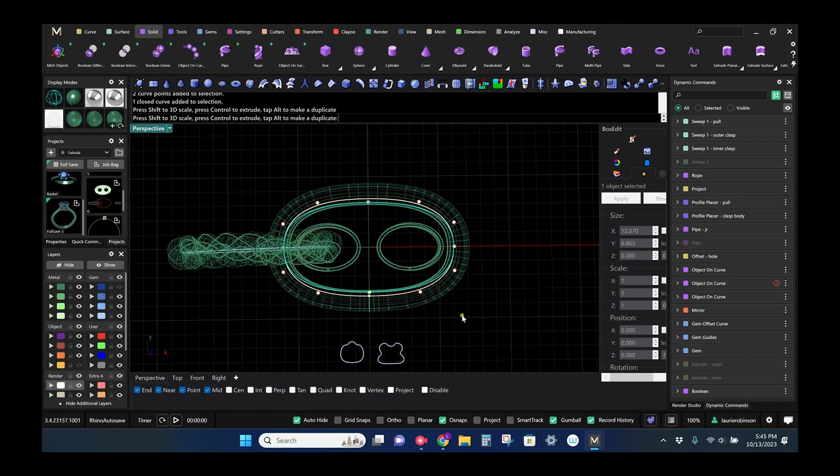And maybe, okay, so all of those updates are happening, and you know, maybe I decide, well, this is too busy, this frame, I really want just

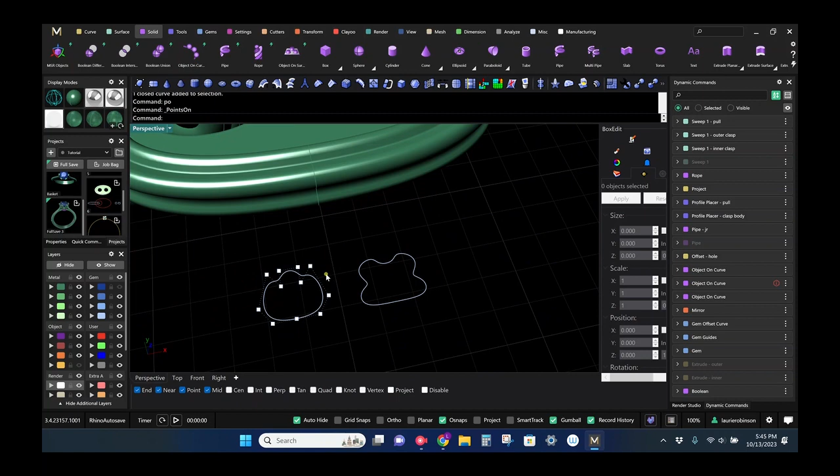to have something simpler, or more like this. So let's even make it even more simple. Just get rid of these. And you can just come in here. Oops, I didn't label these and now I forget which one is which. It's not this one. Gonna get rid of this. Choose this.

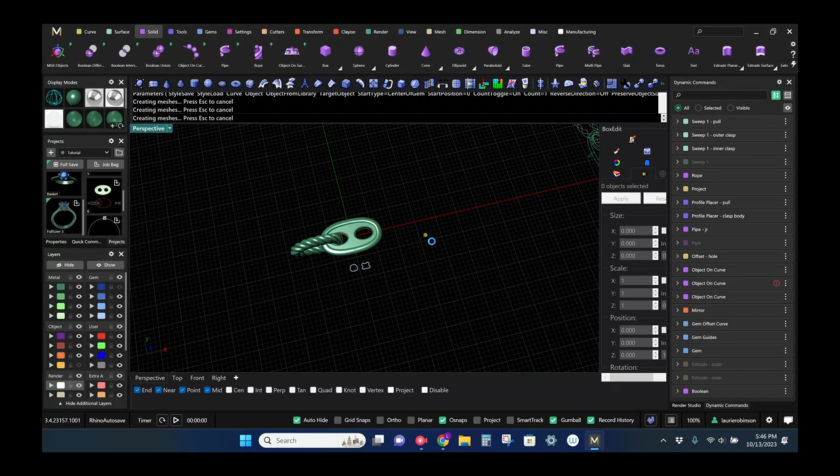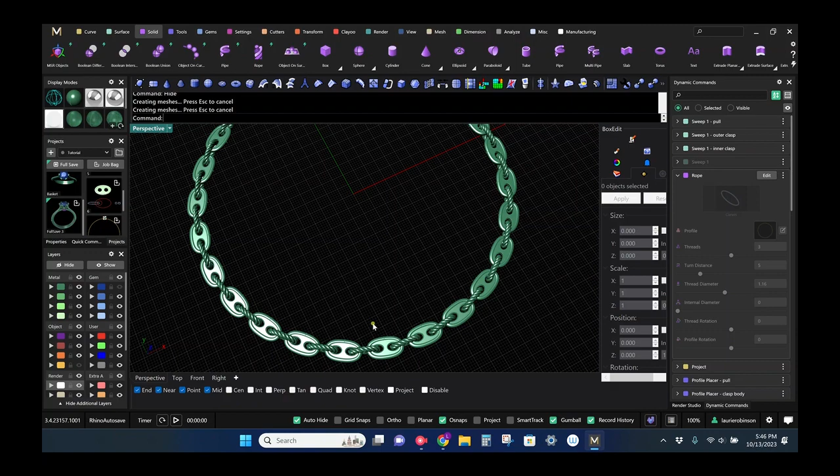Okay, and then you should see that reflected all the way around. Yeah, so it's just super quick and easy. And again, I guess what I really want to stress is I really like that you can end up with something that looks so nice in a rendering, or really nicely finished and smooth, but it remains totally parametric and completely easy to adjust. So I hope you enjoyed watching this and that you got something out of it.